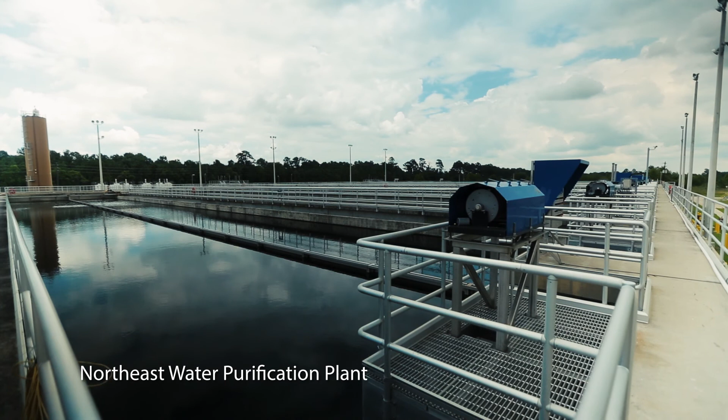So where we are today is we have an 80 million gallon per day drinking water facility that was commissioned in 2006, and it was a joint partnership between the City of Houston, North and Central Harris County Regional Water Authorities. The future of the plant, the expanded facility, is going to continue to allow the City of Houston to produce superior water that exceeds all the regulations, but also exceeds all our customers' expectations.

We are expanding the capacity of the existing 80 million gallons a day water treatment plant to 400 million gallons a day. And the reason behind the expansion is because over decades, Houston has gone through subsidence. And primarily that's because historically we've been using a lot of groundwater instead of surface water.

We have a clay structure such that as the water is withdrawn, the clays settle like a deck of cards would, and there's no way to resuspend that and recover that settling. So that's called subsidence. And that can contribute to water ponding and eventually flooding in a certain area.

The Houston area is prone to flooding, and so we can't afford to have our ground surface lower than it is now. By providing this expansion project and providing surface water as a replacement to groundwater, we are hoping to slow down or eliminate the rate of subsidence in this area.

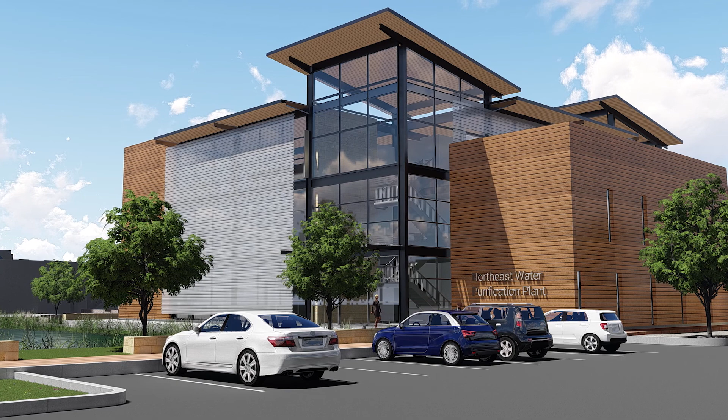It is going to be built in multiple phases. The first module, which will contain 80 million gallons a day production capacity, will be brought online and deliver water in 2022, and the remaining 3 modules will be brought online in 2024. The plant will produce a substantial amount of the region's drinking water for generations to come at a very cost-effective price.

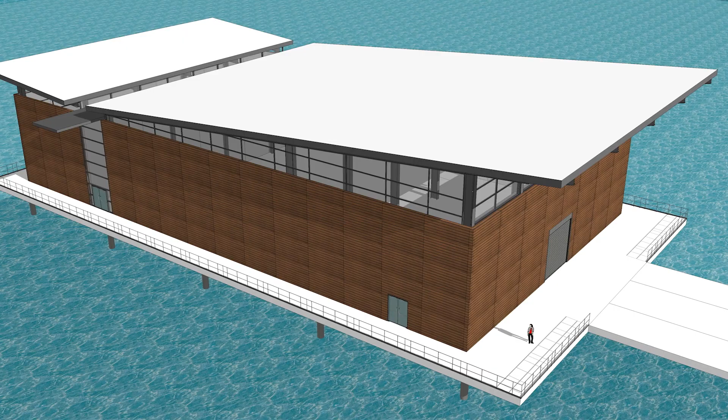So the project will include a new intake out on Lake Houston, and then there'll be 2 pipelines from that intake to our new treatment facilities that we're going to build next to our existing plant. And those new facilities will include coagulation, flocculation, sedimentation, which are used to purify the water. And then we add ozone to the water, which is a really powerful oxidant that will help disinfect and purify the water even more. And then finally there'll be filtration and then pumping that'll send it out into the system.

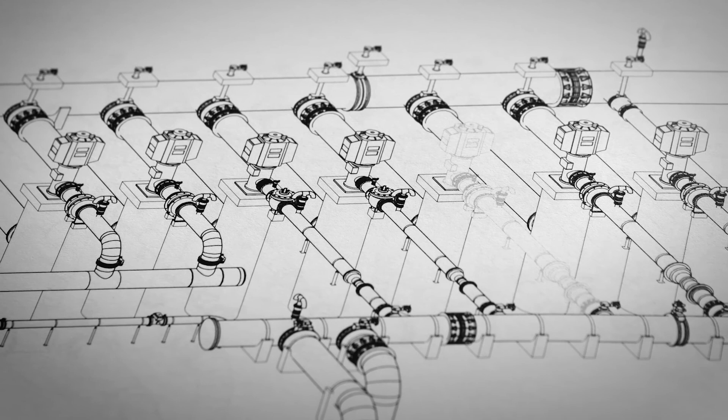Ozone will be a big benefit to this project. It's a newer technology that we're adding into this process that the existing plant doesn't have, and it provides a lot of benefits from disinfection and then its ability to make the water have less taste and odor.

There are currently 4 regional water authorities that are converting to surface water. We are all working together, sharing the cost of the new water purification plant. We will be sharing the cost of the major distribution pipeline to get the water to our area.

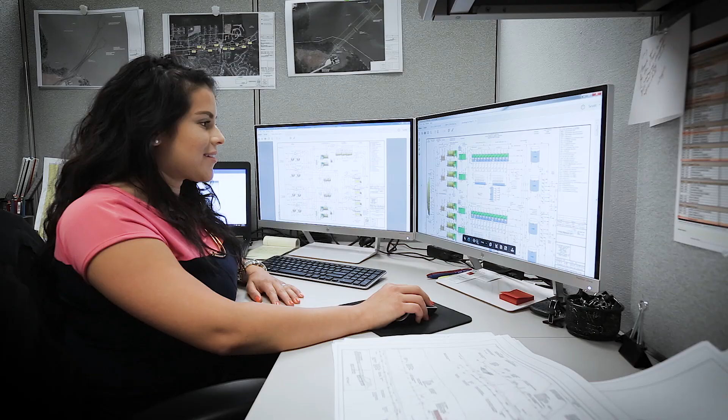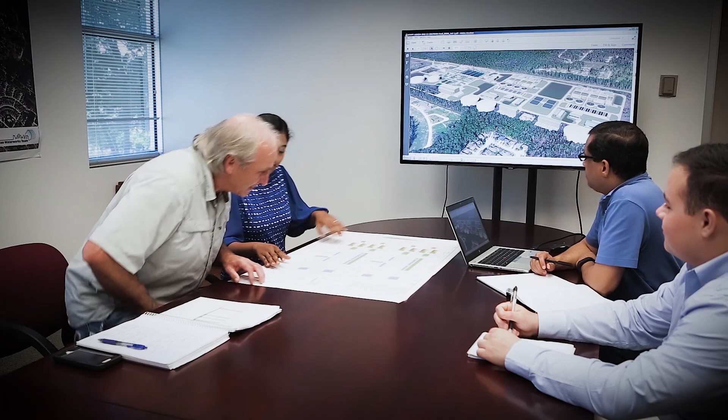It is a very innovative and collaborative approach where we're partnered with the Houston Water Works team to do a progressive design build. In a progressive design build, we're actually partnered with the contractor before we have the design complete. They're helping us look for innovation, they're helping us look for efficiencies, and it is a way for us to have the constructor part of making sure that the decisions we make along the way are the best for operations, for efficiency, and for overall sustainability for the project when it is built.

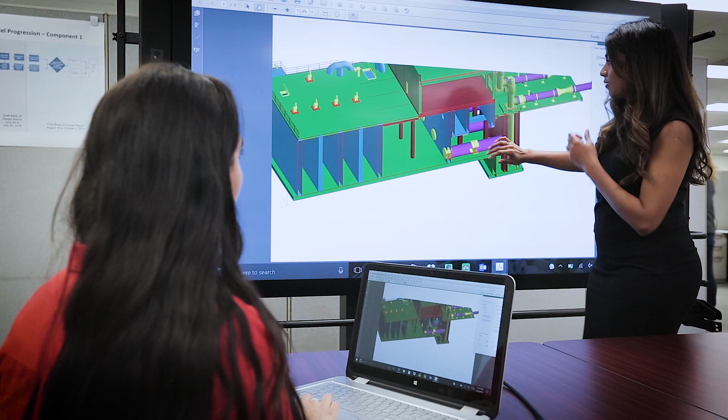I kind of see this as a team of all-stars. Most engineering projects, you have one engineering company that's taking the project from beginning to end. In this case, because we have 5 participants with the different authorities, it's a unique opportunity for the best of the best to get together and collaborate and come up with a really special project.

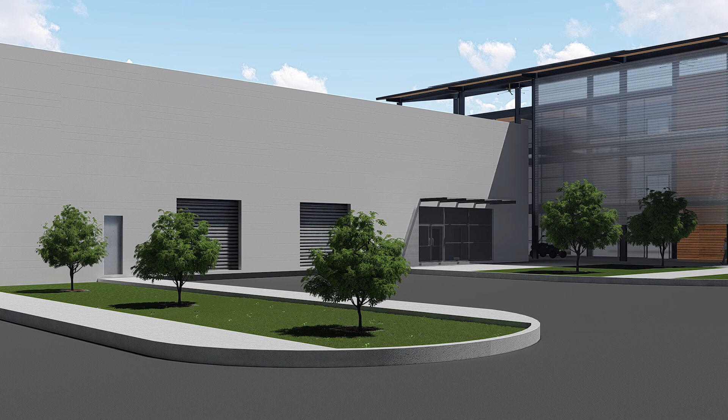So it's important for us to be good neighbors. We want to preserve the natural beauty of that part of Houston, and we want to ensure that folks feel good about this facility from the outside. During the construction of this project, there will be a lot of equipment that's coming in and out. There will be a lot of activity that's happening on the site. But we're going to work hard during the construction to make sure we keep dust down.

We have all of the construction coming off of one of the frontage roads, not coming through any of the neighborhoods. And then the fence that will be put to secure our facility will actually be designed with aesthetics to complement the neighborhood. One of our goals in this project is to be a good neighbor and leave it looking very nice from the neighbor's perspective.

So we're going to try and do our best to leave tree buffers around the edges and do a lot of replanting and just, at the end of the day, really make this something that we can all be proud of.

We want to hear from the public about any concerns that they may have on this project, and we have a number that they can call. We also have social media available. We also have the website set up for this particular project. They can go onto that website and subscribe on that website so they will be updated constantly when any change on the project happens.

I look at it as an opportunity for Houston to shine. This is an opportunity for folks to come look at a plant that will be and should be the best in class. This is a project that will serve generations to come. This is a project that will give clean, safe drinking water to the community and will also reduce dependence on groundwater and reduce the subsidence.

The City of Houston provides great water, and the robustness of this plant design will ensure that we can do that well into the future. This is a major, major project utilizing state-of-the-art technology, innovations, collaborations, partners in order to make it happen, benefiting the entire region.